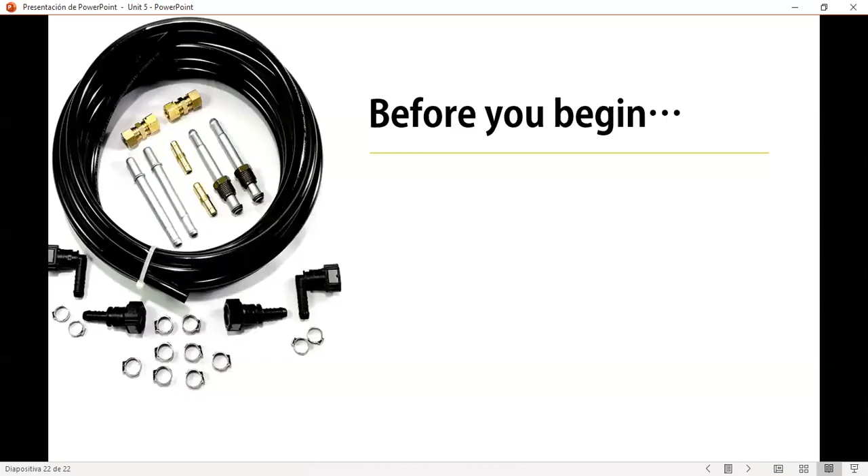So let's take out some definitions in here. I want to know about hydraulic pipe, the fuel line, the ruptured, and gliding. These four words, you read them in the article.

So talking about a hydraulic pipe, what I just want to mention is you might know what it is. It's a line, hydraulic lines, where the oil flows through that material. So it's described like a high pressure oil pipe, isn't it? High pressure, yes.

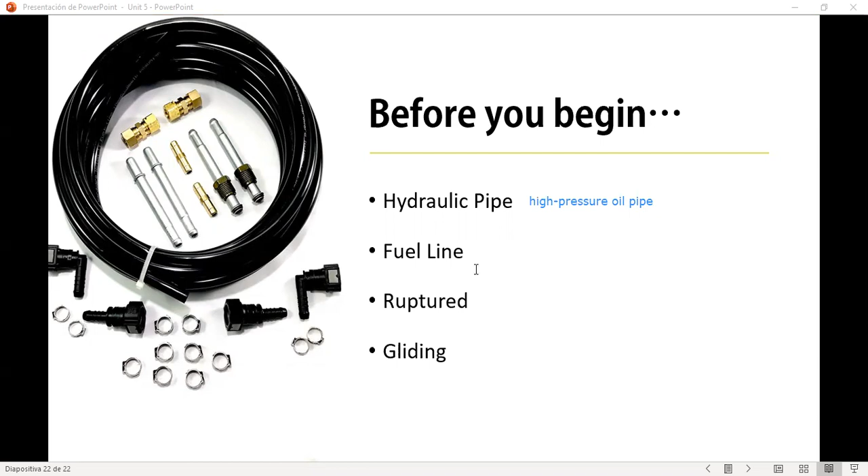Then you have the fuel line. In this case, it's a hose. Yes, it's a hose, like a fuel hose.

Then you have the rupture. I think that is described in one word, it's something that is broken or cracked, like broken cookies, crackers.

And well, gliding. I don't know if you've heard of the parachute gliding sport, extreme sport, parachute gliding. Have you ever heard of that? I don't remember the name. Parachute gliding, it's when you throw yourself from an airplane into the air and then you use a parachute, paracaídas. So parachute gliding is when you do that.

You jump into the air and you just go flying without power. Es decir, ahí flotando, gliding, cayendo con el mismo aire. That's the gliding.

I have to identify that term because the synonym, I have different synonyms like floating, or I don't know, but in this case, it's in the air without power.

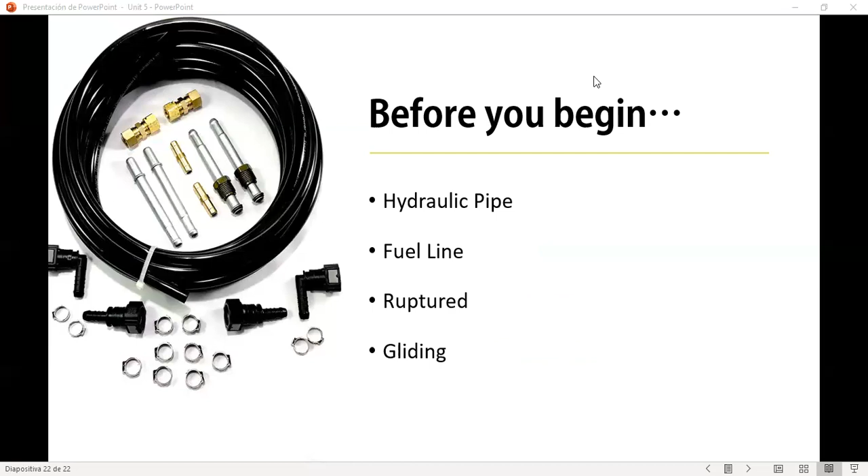So let me erase this. Yeah, please. And let's change to the book. Good, very good, okay, there it is.

So we have three questions now. Look at them. Could you please read the questions?

How did the problem start? Number one. And number two, what were the initial, unseen consequences? And number three, what were the subsequent consequences? So we're talking about a main problem and then the consequences that main problem caused. And how did the problem start?

So, according to what you read, let's answer these three questions.

Well, in this case, how did the problem start? The problem started when an incorrect hydraulic pipe was fitted to the right hand engine. Maybe that's the initial problem? Yes, I think so, it was that, an incorrect...

And it's one of the words of the vocabulary, incorrect - an incorrect or oversized hydraulic pipe that was fitted. So that was the initial problem, okay?

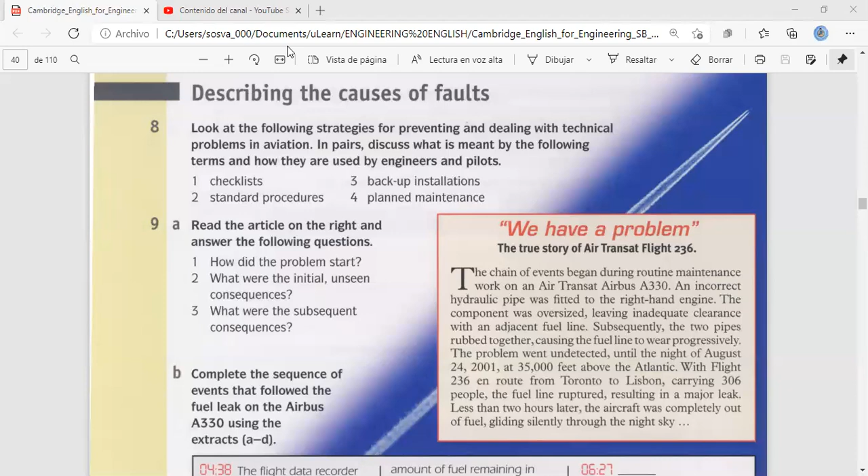Now, in letter B, we have a sequence of events that follow the fuel leak on the Airbus A330, using extracts A through D.

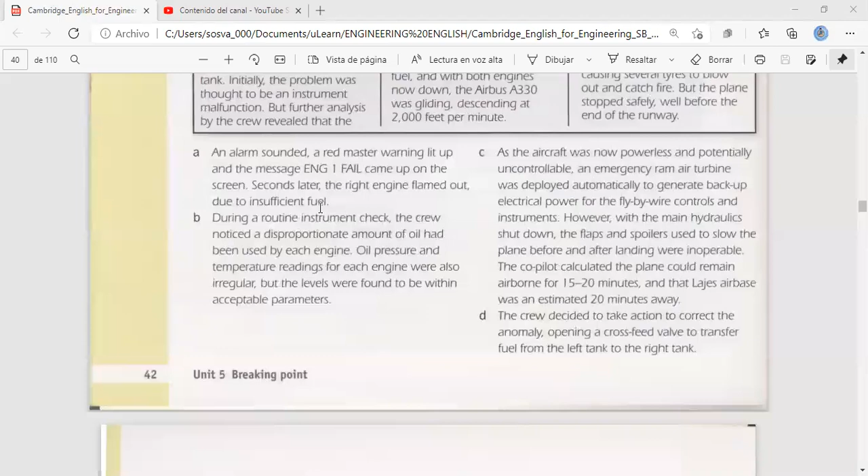So what you have to do here - and I'd like this to be your homework - you have to complete the schedule, an itinerary. You have 4 different activities here, and you have to fit them inside this schedule, thinking which one would be the right order.

You have 4 different situations that happened, from the beginning of the rubbing between the pipe and the fuel line, until the fuel line ruptured in the air and had a major leak, and the aircraft stayed without any fuel.

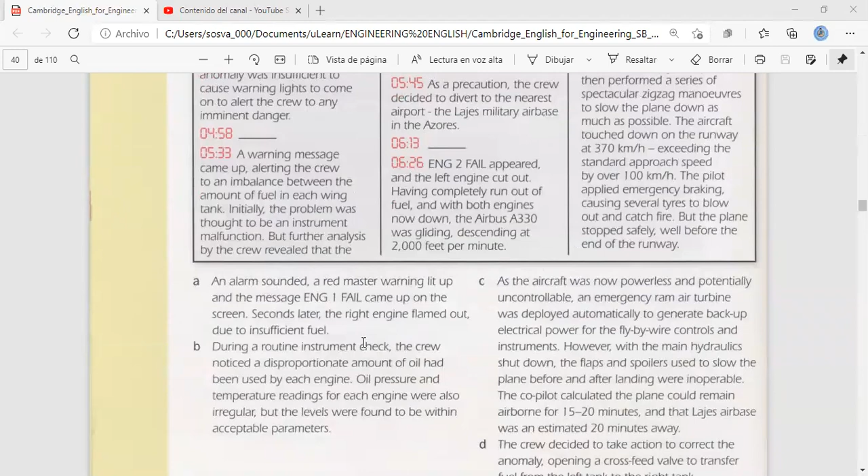All right, and I actually like to do that. So you have to read the text, the schedule, and read the other activities, so you know - oh, this happened first, and then this one, and so on.

In this case, I have to express the time always - well, you just have the hour in that part. For example, 4:38 - this is like the register of the activity. So at 4:38, the flight data recorder registered an abnormal increase in fuel consumption. So this is like the first register of the problem.

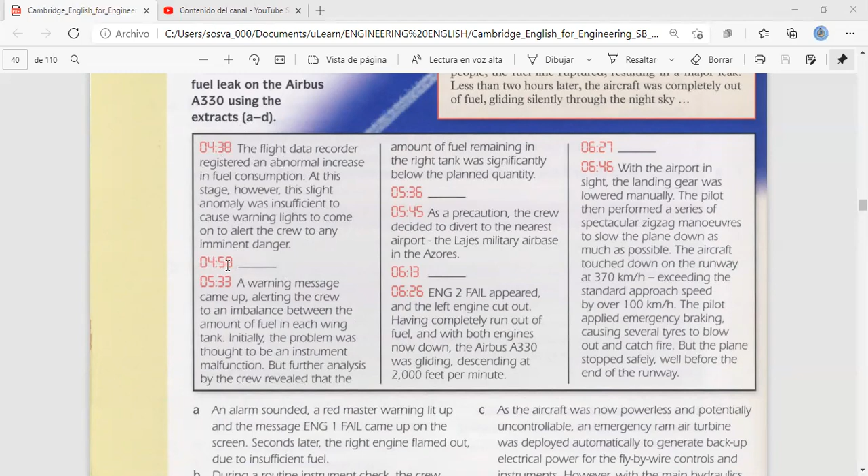And then what happened at 4:58? An alarm sounded, the aircraft was now powerless, the crew decided to take action, or during a routine instrument check, the crew noticed a disproportionate amount of oil.

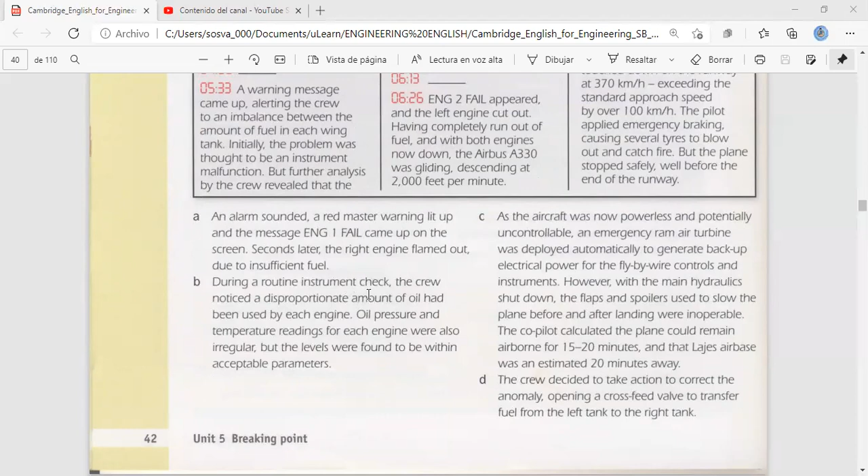So you have to identify the activity - what happened next? What was the second action that happened during this problem? And you go like that with 5:33, 6:13, and 6:26.

Good, it's okay, and that will be your homework actually.